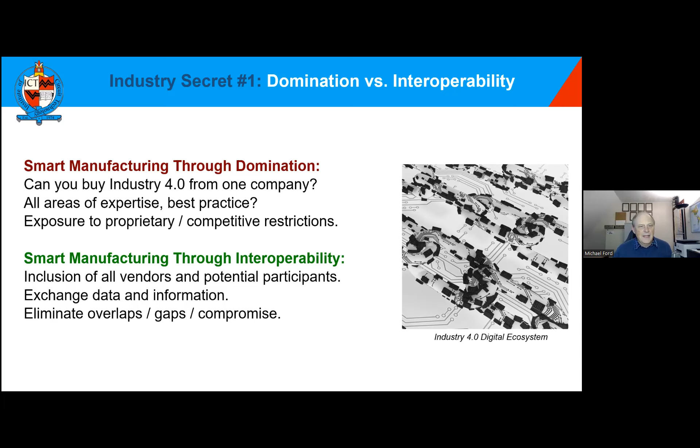That's very nice. Well, what about the software side? It must be necessary to do the same on the software side, because we can't have one company that provides everything. We need to be inclusive of vendors that have domain expertise in, for example, quality or materials or many different areas, each of which contributes its own value to the holistic operation of the factory. So we need to start to exchange data and allow different people to fill in the gaps they have for their smart digital transformations.

So that's the first secret: we don't want to be dependent on any one big company.

The second secret we're going to talk about is standards. Now, there are many standards in the industry that go back many years, of course predating Industry 4.0. They were a kind of de facto standard, where people were using a certain technology to move data around. They wanted it to become a standard, and so they made it their own standard. Unfortunately, these standards—OPC-UA, MTConnect, there's a lot of different ones out there—

they're all very good, but they're based on an ecosystem that features customization and middleware. So you need a lot of work and effort to extract data from them consistently and sustainably. So why did we at the IPC think, well, we need another standard for that?

Basically, for full digital interoperability, we don't want barriers where you need to be dependent on customization and middleware. We want to eliminate those costs, because the cost of that data exchange far exceeds the cost of the actual software in most cases that is creating the value.

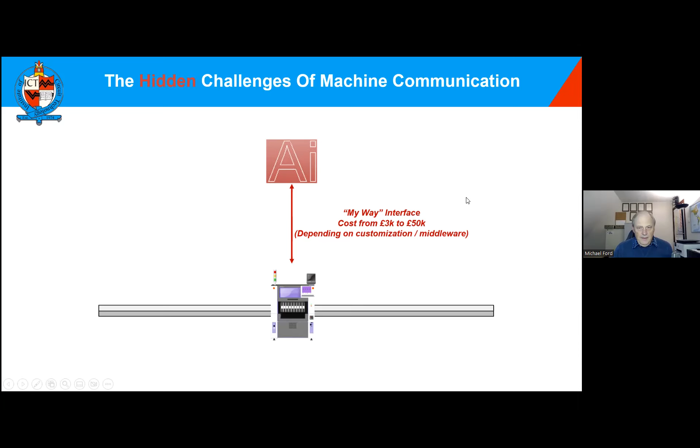Here we have a machine on a production line, and we have a little bit of software, and we want to connect the machine and the software together. Now it has its own special way, this bit of software, to talk to the machine. This has come from discussions between the vendors. The cost for that, let's say on a good day, and there is already an existing interface, you're going to spend about $3,000. I've got it as pounds here, but they're pretty much the same thing these days. But if the interface does not exist, then you're going to have some customization. We often see projects that are going to look at about $50,000 to create a bespoke interface between these two things. That's a little expensive, but if needs must, then that's what we have to do, which is fine for one machine.

But even though we've got machines that look similar, actually, they're not similar inside. They use different communication mechanisms. So that initial effort to make that interface, you're going to repeat that several times if you want to talk to different machines. Now, there was one company in Europe, a telecommunications company, that did a bit of a survey for their smart digital transformation. They found that they had 12,000 different devices and processes that they wanted to connect as part of their smart factory. Can we guess how well that went?

Because it gets worse. We have more than one piece of software. We spoke just now about interoperability. Well, here's some examples: MES, PLM, quality management systems, energy. There are so many different things today that we want to do with the data that we get from these machines. And as we said, no one supplier is going to provide everything. So let's say we just have 3 different solutions in there. How is that going to make things look? Well, it's not good because all of these different solutions have their own different ways of getting the data from the machines because they were developed independently of each other. And so in their discussions with the machine maker, they had different pieces of data and they got them in different kinds of ways. So this is looking a little bit more complicated, but we're nowhere near the end yet.

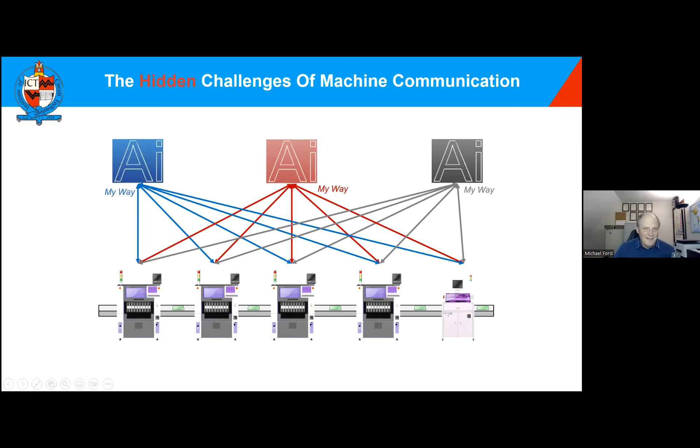Because machines now talk to each other. Closed loops, machine learning, data is passed from machine to machine so that each machine can get the context of what is going on in other places in the lines. So we have to add these kinds of interfaces into the mix. Okay, so we got there.

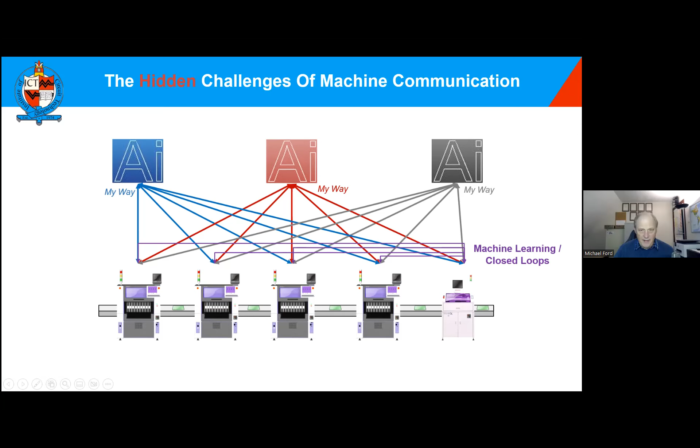Then our IT guys come in and say, well, hey, you've got all this data running around, and that's a major security issue. It is said now that more than half of the manufacturing companies worldwide have been targeted by a cyber attack. We need firewalls. We need rules that set out what can pass and what should not pass. So each of these my ways, you end up with a complex set of rules about how the data should flow. So that's another overhead that you need to build into your plans.

But wait a minute. The machines themselves also have computers inside, and they are also vulnerable. There was one site we heard of where going in, everything looked okay, but everything was running a little bit slow. On investigation, they found that the computers inside the machines were mining Bitcoin. Somebody had gone in there with a USB stick, a mining program had been put on all of these machines, and they were all compromised. So now the machines need to be protected as well from each other on this OT cybersecurity infrastructure. So again, you've got rules and rules, you've got compatibility issues. One set of rules is talking to 3 different firewalls. It's an absolute IT nightmare.

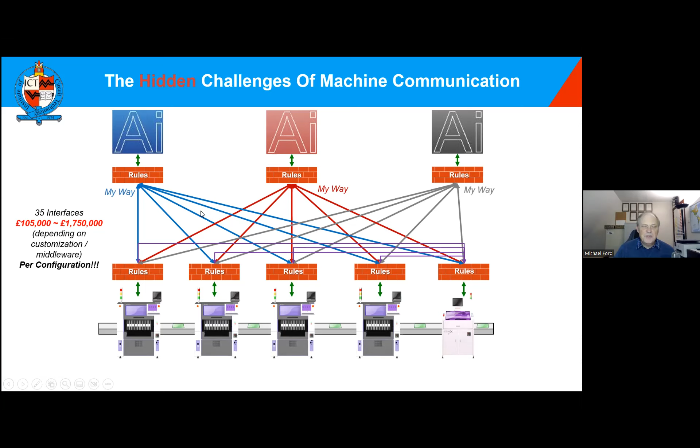That's the best case scenario. If the interfaces did not already exist, you're looking at getting on for $2 million because inflation is working as well. And once you start talking about millions of dollars, remember, we haven't created any value yet.

All we've done is transfer the information from A to B. We don't have budget for anything else. This has used up all of our effective budget. Manufacturing is not that rich when it comes to spending money this way. So this is why Industry 4 and smart factories are so severely challenged today, and why people are simply not in the position to utilize it.

Is there an alternative? Of course there is. Using the standard, the Connected Factory Exchange, which I'll be talking a little bit about. This is an IIoT plug and play standard where there is one language, there is no need for any middleware, there's no customization needed. This whole scenario boils down to 8 standard CFX connections, which would cost about $24K. $24K is acceptable for pretty much any smart manufacturing project, whereas $2 million would not be.

I think we can all agree on that, yes? And in terms of firewall, very little is needed because we can do everything through CFX. So this is the ideal case where CFX is working in a factory.

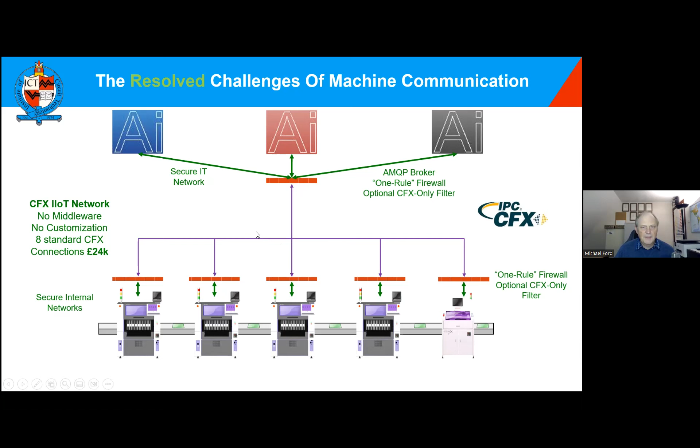Now, what is CFX? It's an IPC standard, which defines IIoT-based plug-and-play data exchange. It's written, like all IPC standards, by the industry members for the industry. We have about 200 or so companies as part of this. Obviously, no licensing or anything like that - this is an open standard.

We have secure end-to-end encryption, TLS 1.2, so that every message you can send it locally, you can send it across the planet and it's going to be absolutely safe. We continue to work on new versions of CFX as we add in new technology blocks for different processes in manufacturing, going beyond electronics into assembly and other niche manufacturing needs. So this is a living standard that continues to evolve.

As I said, there is a defined language with CFX. So you get the communication protocol. We use AMQP, which is created by the banking industry. You've got it on your mobile phone if you do banking. It's very, very secure - all data is encrypted. And we use JSON for the formatting of the data. But the main thing that's unique to CFX is this one single defined language content.

So if I was speaking Japanese to you right now, konnichiwa, genki desu ka? You probably have difficulty understanding what I was saying. So why, if humans speak different languages and we don't understand, why do we have machines speaking different languages that we don't understand? Why not just use one? And of course, that one has to cater for everybody's needs.

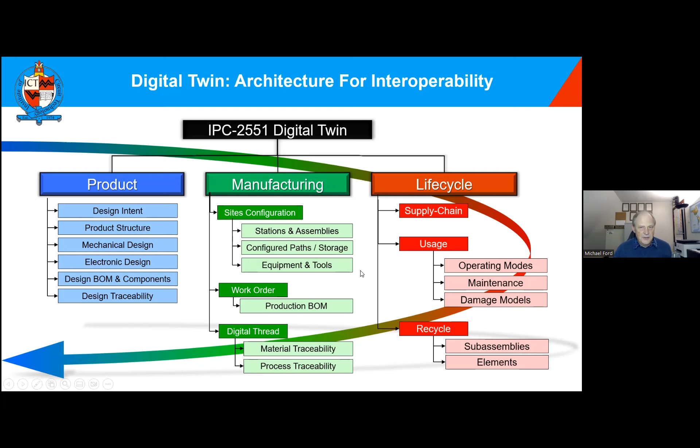So the way it's structured is very simple. If you, for example, play a media file on your PC, you just double click it and it plays in a window. It wasn't always like that, because different media files have different codecs, different frame rates, many different things that need to be sorted before you play it. And so these files have metadata which explain all of this detail so that players can play them.

The digital twin is exactly the same. You have data content and we want to understand what is it, what format it's in, how should I use it, who populated this, whose data is it actually, and are there any access profiles, etc., that I need to be aware of. So that we can have the exchange of data in a way that's very, very secure.

Now I want to mention security a little bit more, because this is a very critical point for smart manufacturing going forward. There are those who say CFX is wonderful, digital twin is wonderful, send all your data into a lake, just make it all available, people can use it, it's going to create a huge amount of value, and it's all true. Except that there are always people who would want to take advantage of that. Some people want to make benefit, other people want to make benefit for themselves. And so we need to be aware of the security of doing this.

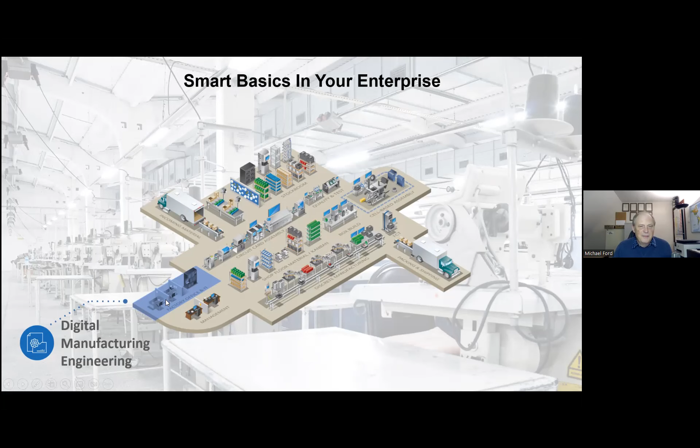Now, there are a lot of areas in manufacturing that we might want to look at. Digital manufacturing engineering, so understanding the product. We need to know what we are doing, what we're supposed to be doing. That always helps. That's a good bit of information to contextualize against.

Materials. We may be using the ones that were defined in the design. We may be just using the ones that were cheaper and freely available at the time.

MES, we need to ensure that every process is working properly. It's been set up properly, that things are executed in sequence correctly, and any exceptions like a failed test are dealt with appropriately. So it's the management of all of the different processes that go on across the shop floor. And the vast majority of this can be automated.

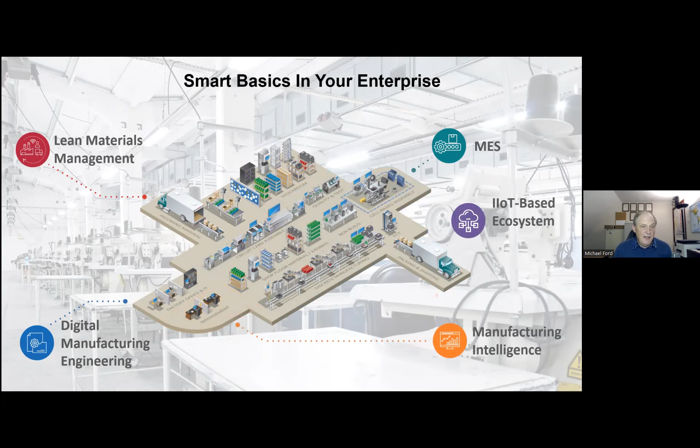Bringing then the information back as intelligence, we enable the trend analysis, the visibility, the dashboards, etc. And of course, that is then based on our IIoT ecosystem, CFX. But as we said earlier, there are many different other applications as well.

Planning, quality management. A factory cannot do without these things. And even beyond manufacturing. Initial manufacturing, it is said, is only going to be half of the total manufacturing effort in the future, where we need to be recycling at least as much as we're manufacturing in order to build a sustainable economy. So repurposing things, refurbishing them, changing products from one thing to another, maintaining them, repairing them is going to be of equal importance. So this is where we can have a lot of value.

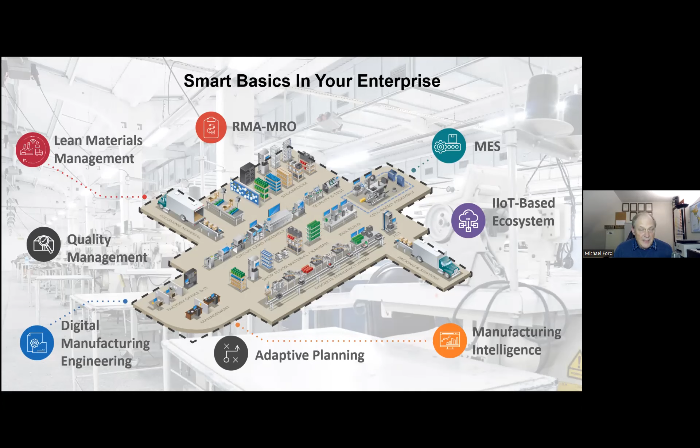Let's take one very simple, basic example of how to become smart in this area. And it's looking at material management.

Oh, hang on, we've got a system for material management already, don't we? We have ERP. ERP is managing all of the materials, the ordering, and making sure the materials are delivered in time for production to start. Well, that's true.

There's nothing wrong with ERP, other than the fact that it basically deals with how many part numbers and how many of each part number we have. It may know that those parts are in the warehouse. It probably has issued them to manufacturing and assumes that they are being consumed or whatever by a simple backflush process.

But we have problems with this. We have attrition, we have scrap, we have waste, spoilage, we have errors that are being made. We have all kinds of things that together contribute to create unexpected internal material shortages. ERP says yes, the materials are there, this quantity, no problem. The reality, physically, we can't find them.

What happened? So if we look at smart MES material management, we can assign identities uniquely for each carrier of material, or even individually for materials. We can track exactly where they are, the status that they are, how many have been used, how many have been spoiled, part used materials, exactly where they are, and in use. We can associate specific materials to each specific product to get that traceability. So we know the exact quantity, location, and status of every piece of material.

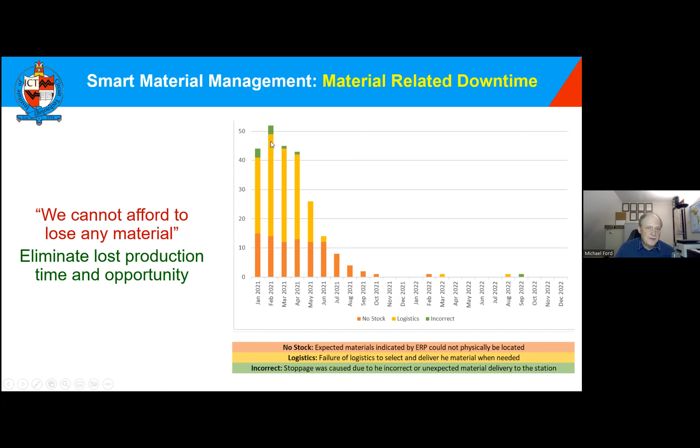Now look at the downtime of operations in manufacturing as a result of this knowledge. Here we were facing a lot of disruption for the apparent loss of materials. But once you are able to know for absolute certainty that the materials are really there, because you know the serial number, you know the quantity, you know the complete history, this gets to pretty much zero. Whereas before, many, many hours were being lost of production time simply because we'd lost the material or there'd been some kind of internal issue.

Now, these things are transferring into real benefit, aren't they? Because we're reducing the investment in bloated inventory. We're increasing productivity on the shop floor. So this is not just a game of, oh yes, we've got the data in a computer, doesn't it look nice? Actually, these are real world benefits.

People, the people who move the materials around the factory, it's not a great job, but the worst part of it is not the moving of the materials. The worst part is the boredom that you have between the peaks of production requirement, where you frequently see people just sitting around with nothing to do. When you're in control of your logistics, you're able to smooth out those peaks using just-in-time material delivery.

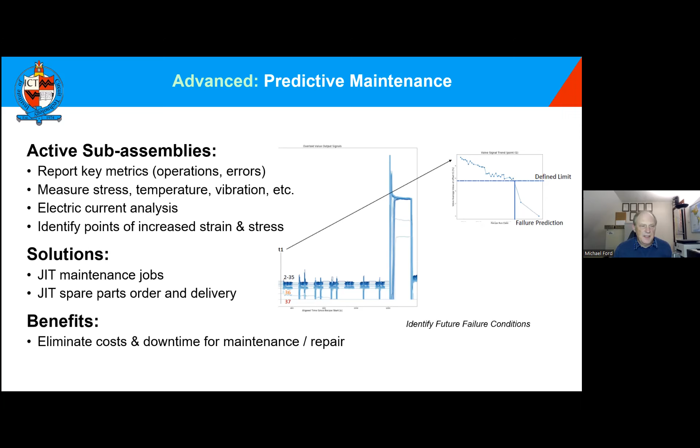That can then be used directly by machine vendors. You have the freedom to select a supplier of predictive maintenance software. It's open - this is your interoperability. So this, again, is another advanced application.

I could talk for another 2 hours, 3 hours. How long have you got? But we don't - we have a couple of minutes left.

But what is next? These are just a couple of examples, one basic and a couple of advanced, where the use of data that provides this interoperability of connection between different machines, devices, endpoints, and software solutions really starts to create benefit for us. And this is what digital transformation, smart factories, industry 4.0 - I don't care what you call it - this is where the value is created.

Once we solve that problem of how to get the data, which seems to have preoccupied everybody for years, once we sort that problem out, as we have done, then we start to create some real value.

So for those who are interested, maybe you've got your own projects ongoing, or maybe you would like to start something, IPC standards committees are open to everyone. There's no cost - you simply join and start to participate, contribute where you like, comment where you like.

But please start to use these technologies, understand how they really start to reduce that cost, that waste of cost in getting operations automated through software becoming smart.

That's what we want. We want to make things better, we want to make things cheaper. We want to have answers so that no matter what the world may throw at us next, at least in manufacturing, we are ready for it. That's the principle of getting smart.